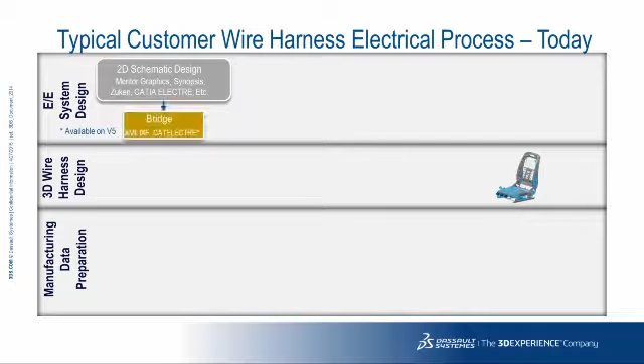In the 3D wire harness design phase, we have the creation of the complete representation of the 3D harness design in context of the product's digital mockup. In this case, we'll assume this is done with CATIA, either V5 or V6. In manufacturing data preparation, again, many different tools are used in the industries.

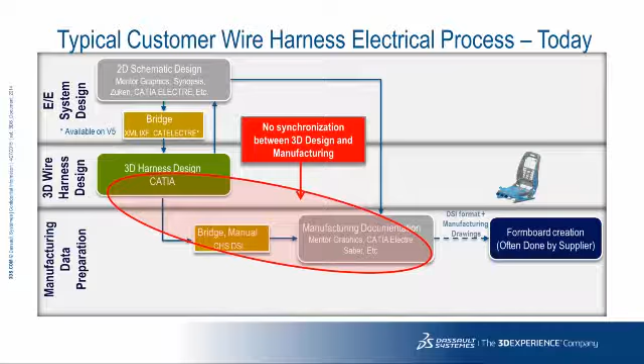The main challenge in this typical scenario are all the bridges and interfaces that are needed to provide the information from one process step to the next. Although different possibilities exist, they are all creating intermediate files that have limitations in sending information to the next step. There's no synchronization between the 3D harness design and the manufacturing documentation. This makes it cumbersome and very difficult to update the documentation while the design is changing. This is costly and time-consuming, and in the end it's difficult to optimize and guarantee the quality of the harness.

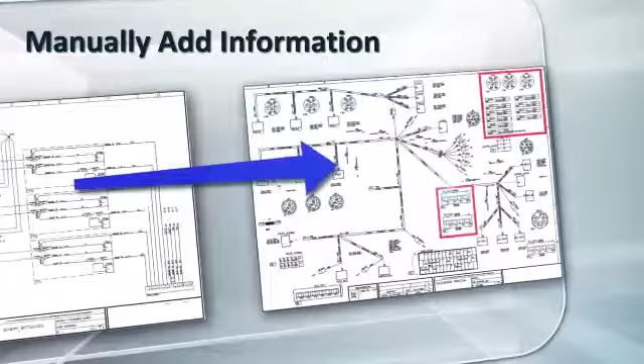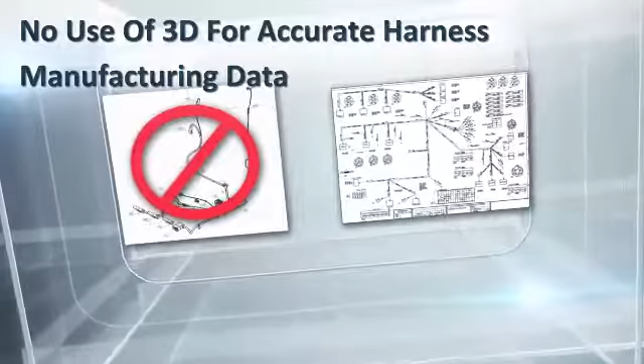The best you can hope for in this case scenario is the partial direct link between the 2D schematic and the bundle documentation. But even with this link, a lot of information has to be added manually to complete the manufacturing documentation. A physical mock-up is needed, with a negative impact on cost, schedule, and quality. There's no use of the 3D wire harness design to create accurate harness manufacturing data. The digital continuity is not maintained between the 3D harness design and manufacturing documentation.

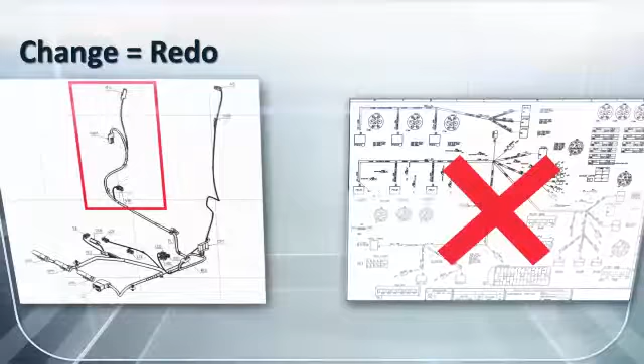Whenever there's a change, everything has to be redone. There's also no automatic update of documentation when 3D or 2D design of the harness changes. Additional steps are required to create the form board on the shop floor. In short, it's very costly and time-consuming, resulting in a lack of quality in the final product.

To improve this current best practice would be to have a manufacturing application that is closely linked to the 3D design, including automatic transfer of all needed information, synchronization, and update once the change is performed in 3D. In this case, there's no transfer of information between applications because they're all integrated in the same platform, sharing the same data describing the electrical wire harness.

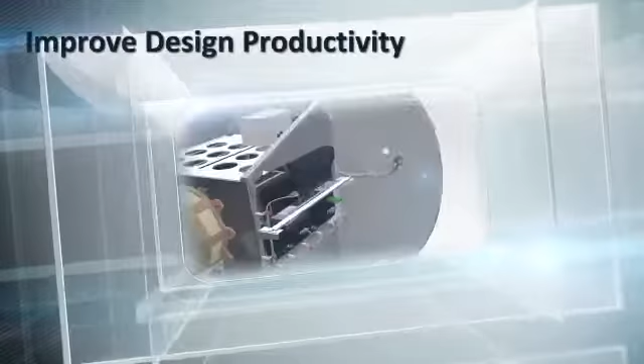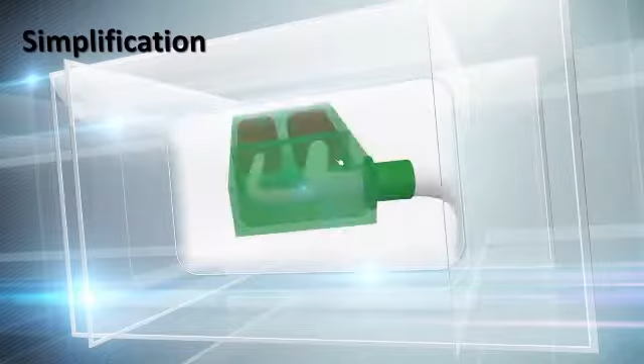This process will improve design productivity through full associativity of the 3D and harness flattening models, enabling design synchronization and concurrent engineering. Automated generation of manufacturing drawings. Simplification of the CATIA 3D harness design methodology without the constraints imposed by downstream tools.

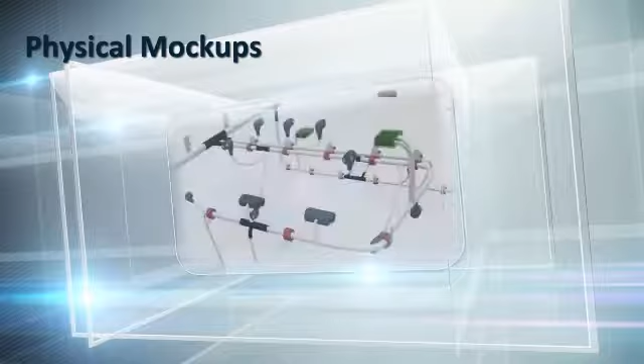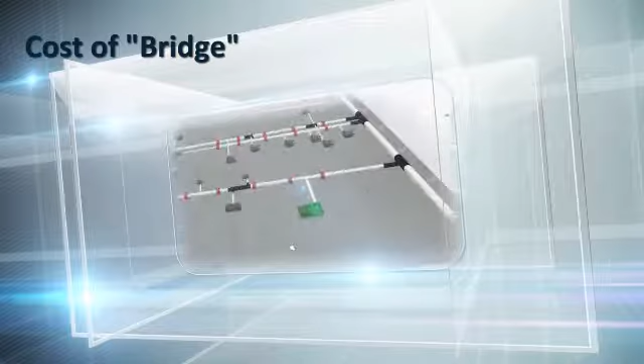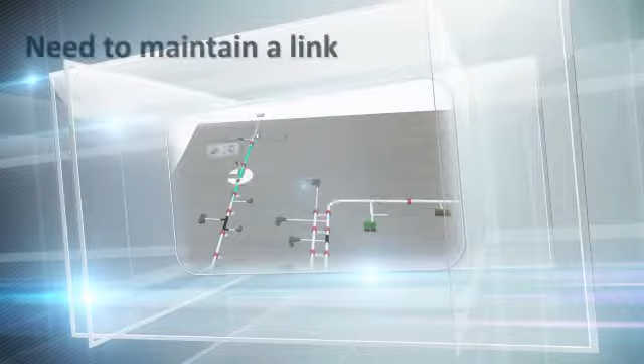It will also eliminate the following: the need for costly, inaccurate, and difficult to maintain physical mockups, inconsistencies between the 3D mockup and the manufacturing documentation, the cost for developing, implementing, and maintaining a software interface or bridge between CATIA 3D harness design and downstream tools for producing manufacturing documentation, the need to maintain a link between electrical schematics and manufacturing documentation, as CATIA electrical manufacturing preparation can integrate exported information directly from electrical schematics tools.

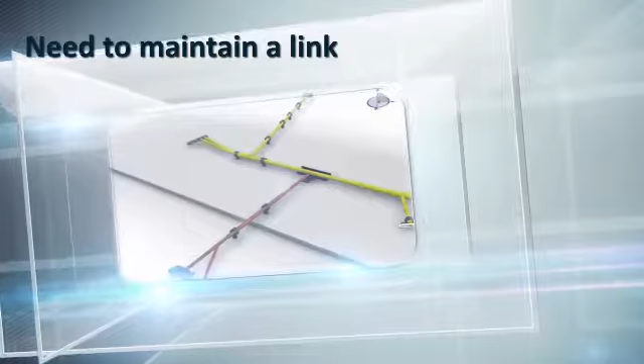In addition to eliminating these issues, it will also improve DMU and harness quality because the 3D shape of the harness and its environment are taken into account during planning for manufacture, resulting in better harness reliability and less maintenance. Also, the inclusion of the wires in the 3D DMU delivers better 3D analysis and simulation capabilities and the ability to manage harness variants in DMU.

Now I'm going to turn it over to Dimitri to talk about the demo. Hello, my name is Dimitri Steinlen.

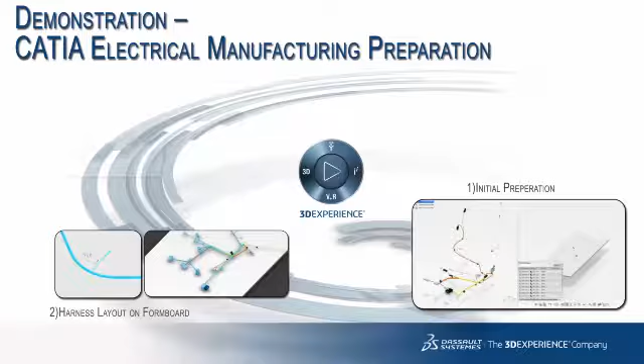If we look at the demo, we first will do an initial preparation, starting with the 3D, creating a manufacturing document which is completely linked to the 3D. Then we lay out the harness on the form board using very simple mechanisms, dragging and dropping, to align it and to optimize the layout, generating the manufacturing drawings, and whenever there is a change in the 3D, and we will show this in the demo, we do a modification and we update the harness documentation.

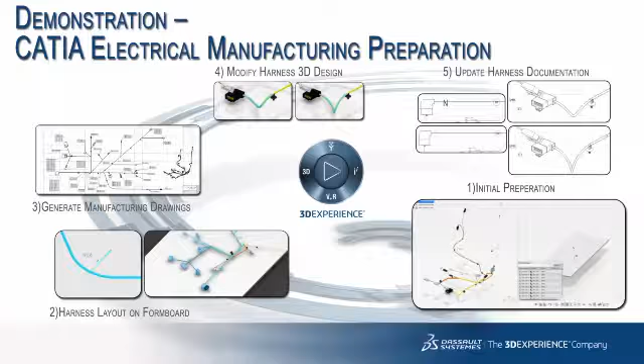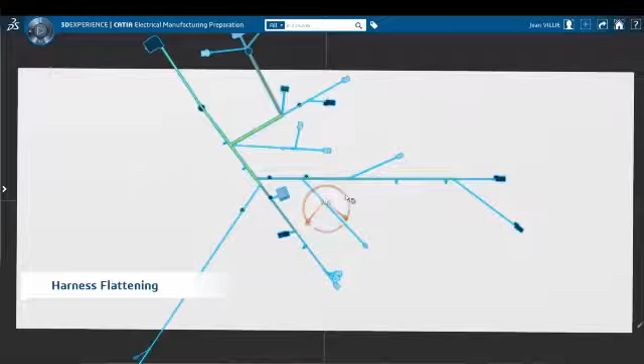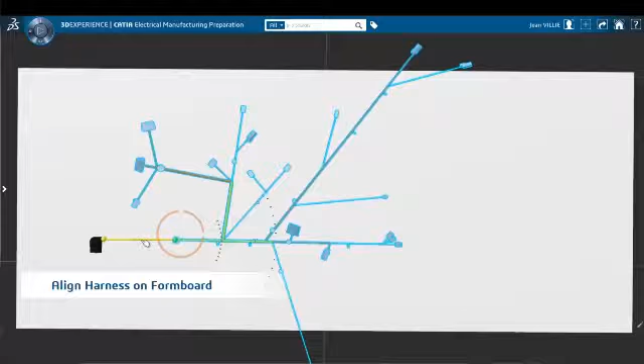So let me just start this short video about Electrical Harness Manufacturing Engineer. This is the product name in CATIA R2015X. As you have seen, we generate a manufacturing document, and here we see how easy it is to align the harness on the form board. The form board, the white plate in the background, representing the form board as is used in many cases in the production. So first aligning the harness by simply selecting the faces,

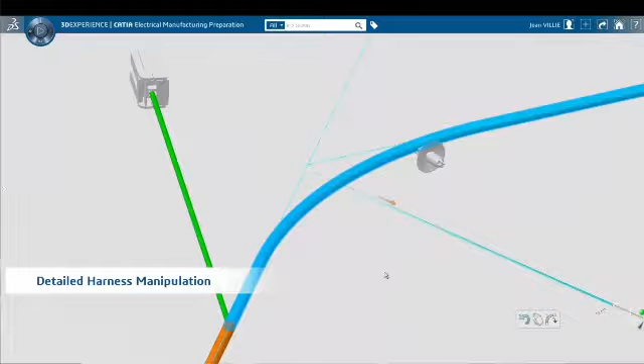and then if we want to do more detailed harness manipulations, it's basically by dragging, dropping, selecting parallel harnesses, and by selecting a corner we can easily adjust the radius of this corner, either by selecting it in space or giving it a real value. Also, more advanced functions like this umbrella are available to optimize the complete layout of your harness. When this is done, we have the harness in the 3D on a 2D plane.

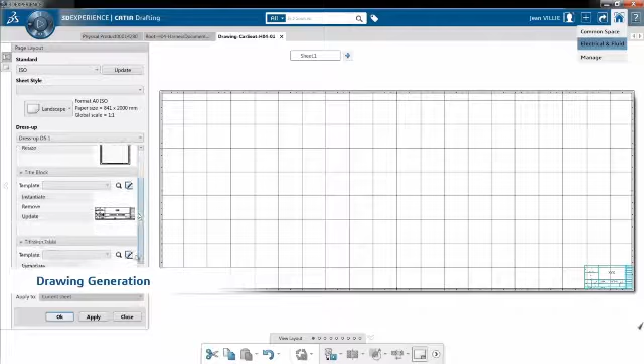We can now simply, by using the drafting capabilities, create the form board documentation. We select the layout of the paper, we have a title block, and we start generating using some advanced automation scripts, automatic text generation. We create the full harness on the drawing, and by simply manipulating some of the text boxes we can create the full harness.

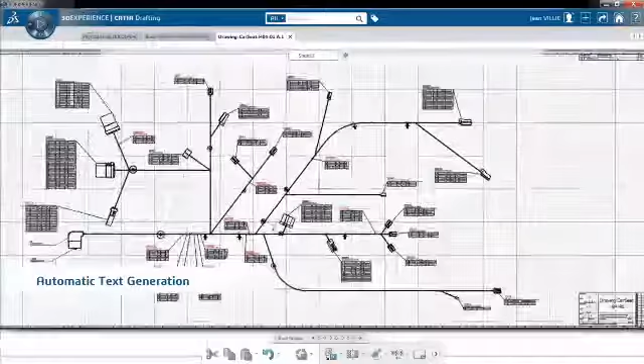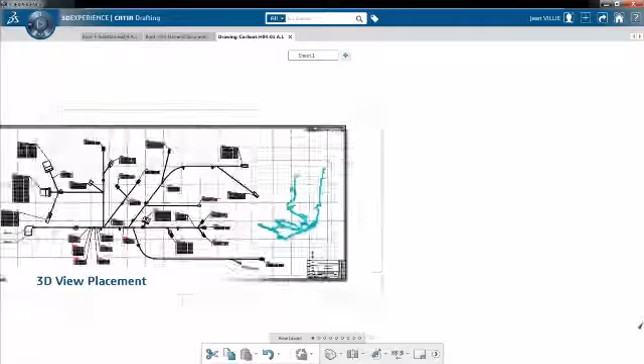Since we also have the 3D view, it's also of course very easy to have, in this case, a kind of isometric view. By selecting a plane, we can create a small drawing on top of the form board, which enables the manufacturing to have a 3D view and also see the location of all the connectors in space. So very easy steps to generate the drawing.

Now if we have a change, for instance, we do a 3D modification, we add some slack to a specific bundle segment. Just by selecting the synchronization panel, it will automatically adjust the layout in 2D and the drawing. So a complete synchronized process.

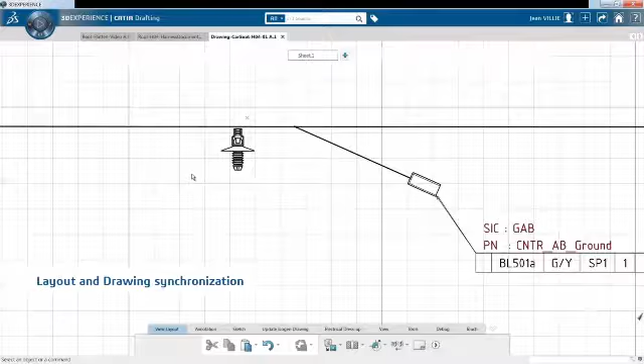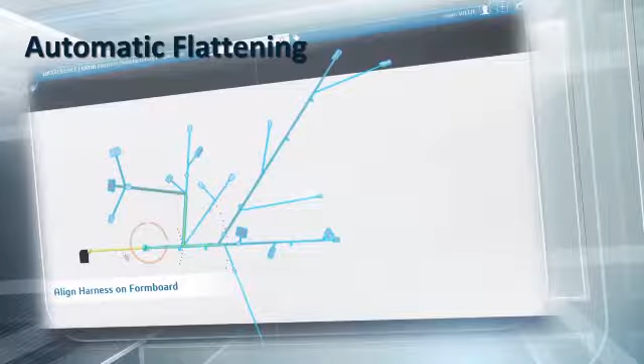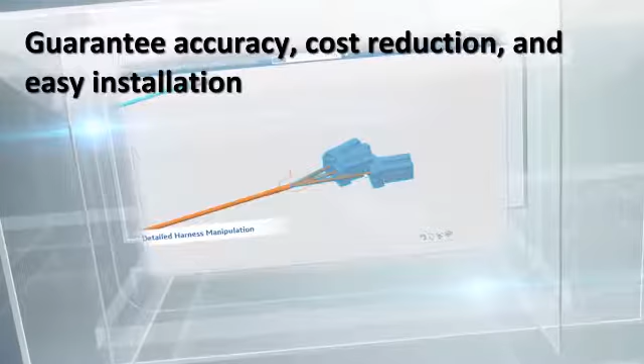Thank you, Dimitri. To summarize some of the key capabilities for form board layout design, first, you may have noticed automatic flattening of the 3D electrical harness, a simple click to flatten the entire 3D wire harness. Next, on the 3D Experience platform, we have very intuitive and easy to use 2D harness layout tools to manipulate the bundle segment. The combination of harness design in context plus harness flattening guarantees accuracy, cost reduction, and easy installation of the final product. Some of the additional functionality is form board tooling design and partial flattening for complex rigid harnesses.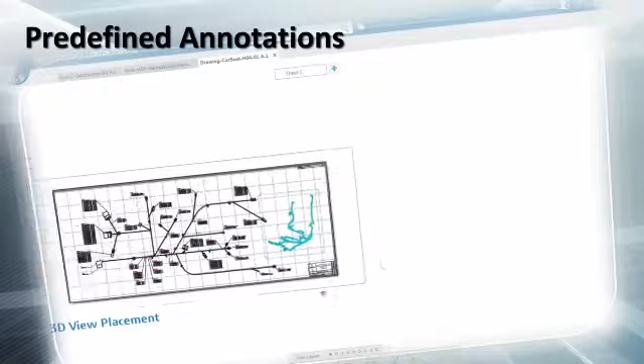Some of the key capabilities in CATIA electrical manufacturing preparation include automatic manufacturing drawing production. Border, title block, and revision table are defined according to the company standards and reused. Predefined view style. Predefined annotations by object type. The ability to include additional views, for example, perspective views of the harness.

Our strategic approach is to go beyond 3D design and manufacturing. We have implemented 2D schematic design tools very tightly integrated with the 3D wire harness design application to provide the complete process coming from schematic, going through the 3D harness design, to the fully integrated manufacturing solution available on the 3D Experience platform.

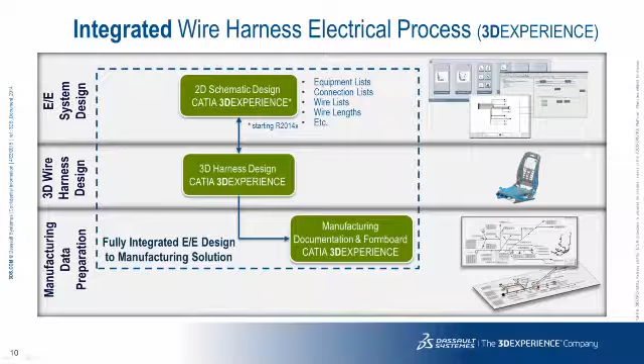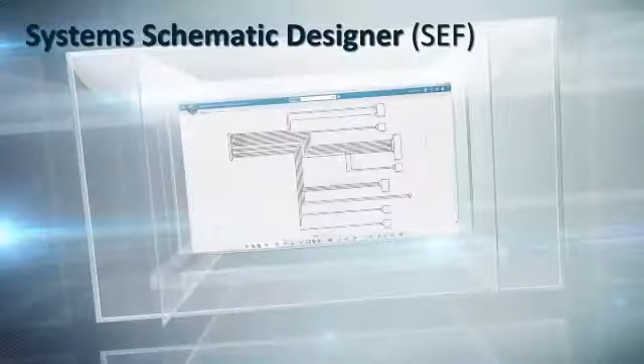For the electrical roles that are now available in R2015X, first we have, of course, the CATIA 3D Experience platform, which is a complete wire harness lifecycle management solution that can be quickly and easily integrated with existing tools and processes. Then we have the Systems Schematic Designer, SEF, which is an intelligent electrical systems design environment that drives real-time concurrent design and collaboration across all disciplines and stakeholders.

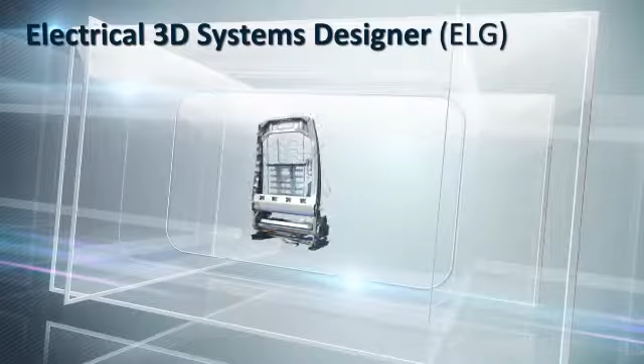The next role is the Electrical 3D Systems Designer, or ELG, which is an integrated approach to electrical 3D wire harness and cabling development that leverages the 3D Experience platform to drive all design activities. And you have just seen the demo on the Electrical Harness Manufacturing Engineer, or EMP, which is an efficient and integrated solution for rapid production of all wire harness manufacturing information documentation and form board.

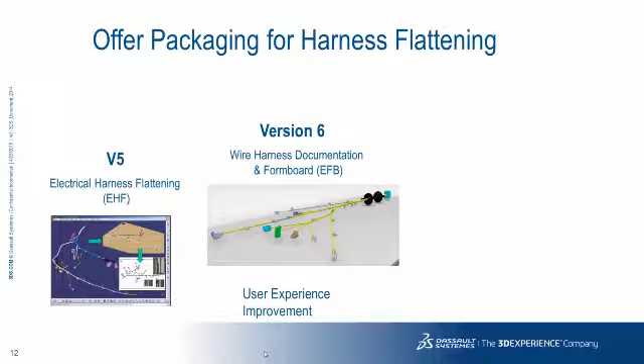The evolution coming from CATIA version 5, we have the electrical harness flattening. In version 6, we started improving the user experience, making it very easy to manipulate the harness on top of the form board, and also adding performance improvements and key functionalities. This then evolved into the 3D Experience platform, which added process simplification, extended synchronization, and drawing automation.

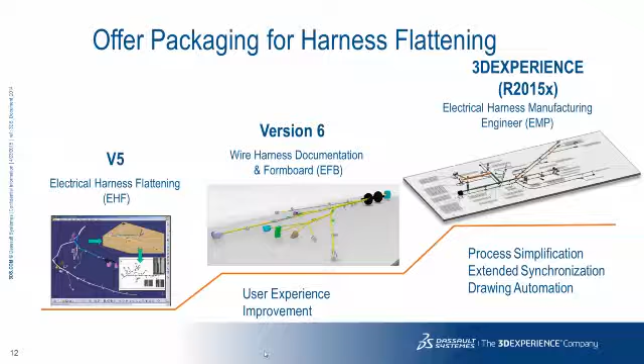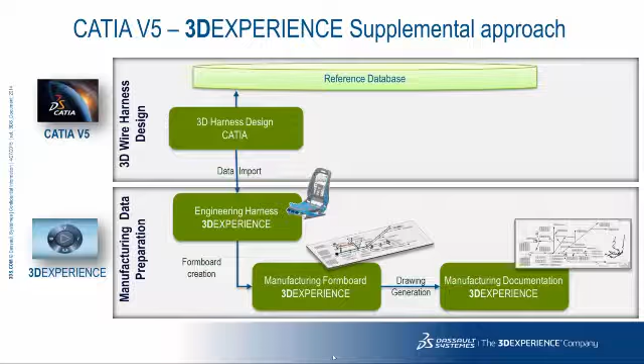A supplemental approach is also possible: to continue the 3D wire harness design in CATIA V5 and to have your reference database with all your mechanical as well. You can import 100% of the data and reuse the 3D harness design in the 3D Experience platform to create your manufacturing form board and drawing, benefiting from the new capabilities in the form board application. You can still continue to store your data and your CAD drawings for reference in your reference databases.

Now we'll show an example of a reference story of a Dutch university racing team that competes in a worldwide competition with over 500 universities. They're using the 3D Experience platform to design the complete electrical for their car. Well, of course, everything we put in the car is very important because we try to build as lightweight as possible, so everything has to really have its function and it shouldn't work without it.

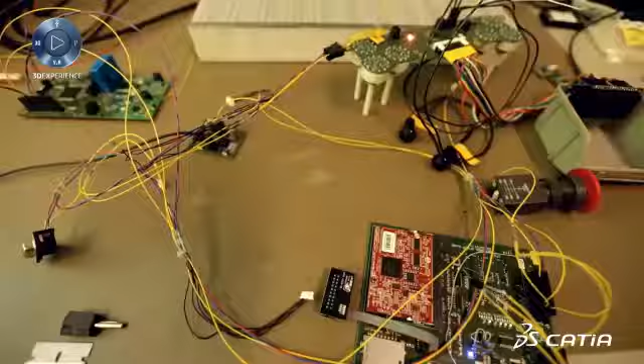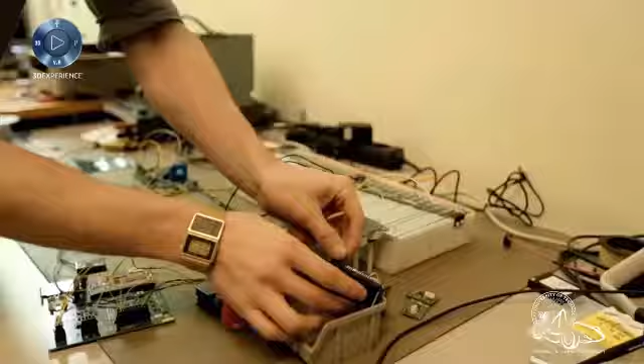The electrical system is pretty special in a way that it really connects every electrical part of the car together. So there's also a lot of things where it can go wrong, so it should really be designed in a way that it should always function, even with a lot of use, since you always remove and plug in parts often.

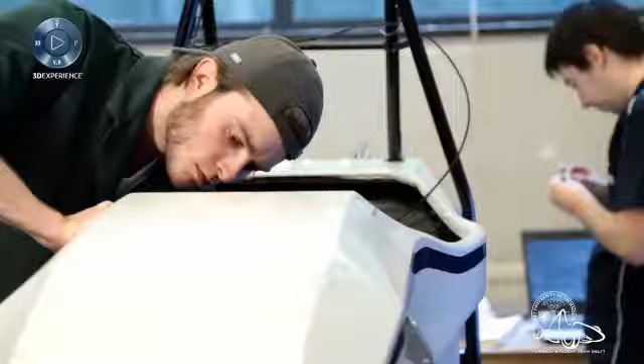To control the motors of the car in the correct way, you need a lot of information about the car, so there's a lot of sensors distributed on the front and the rear of the car which communicate on a CAN bus to the ECU. Here all the calculations for the motor set points are calculated, and all these sensors communicate on one big CAN bus through the wiring harness from the front to the rear.

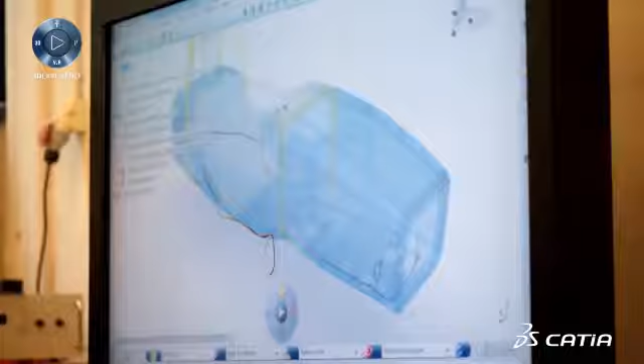Next to this we also have a high voltage system. This means that all the current from the accumulator, which is at 600 volts, goes to the motor controller first, and that is distributed to all the other motors with AC voltage. Because the electrical harness inside the car is actually quite heavy in comparison with the rest of the car, about 2 kilos on a car of 155, there's pretty much to win by making a very efficient layout.

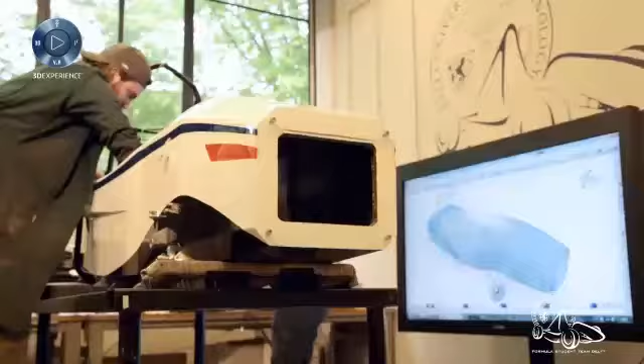So we used CATIA Electrical to lay out the wires in an efficient way so that all the splices are in the correct position and all the wires were as short as possible, so that we could almost halve the mass of the wiring harness of last year. Also, it's very important to have slack on your wiring harness in the right places, so only where you need to move the connectors and not in the rest of the wires. So we could really place it exactly the way we want and then put the slack in the right places.

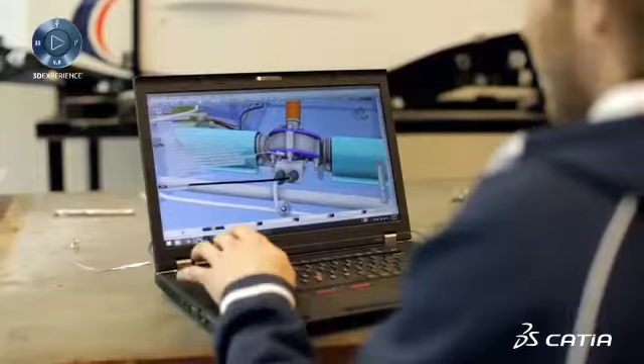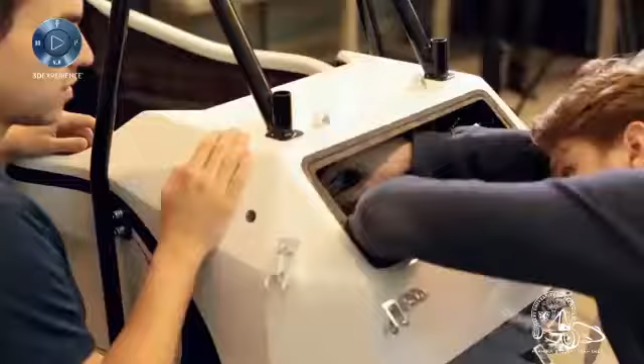The key value from CATIA Electrical is that we were able to quickly make a very precise design to accurately find the routing and the placement of the wires and of the connectors. We used flattening to design the drawings for the wiring harness, which we printed full scale, which was a big help during production. Then we calculated the length of the wires, and we used these during the production. We put them on the drawings. They were perfect in size, which meant we could really go quickly through the production.

We hope you enjoyed this short video. We're continuing to work with them in creating all the harness manufacturing drawings for the next generation racing car, the Delft 15, and it took less than 1 day to produce all the needed drawings to build the harnesses.

Some of the key points in summary for CATIA electrical manufacturing preparation are: the use of 3D DMU information makes it very easy to quickly produce accurate wire harness manufacturing data, including all manufacturing documentation and detailed form board design and layout. There's full associativity between the 3D and the manufacturing documentation, and it provides an easy and safe modification process that eliminates errors. There's also easy synchronization between the harness 3D design and the flattened manufacturing representation, reducing process cycle time.

There is a rapid return on investment through immediate improved productivity, the elimination of physical harness mockups, and improved quality of manufacturing information. Lastly, you have investment protection with the ability to integrate wire harness design and manufacturing processes with the next generation systems engineering tools and methodologies.